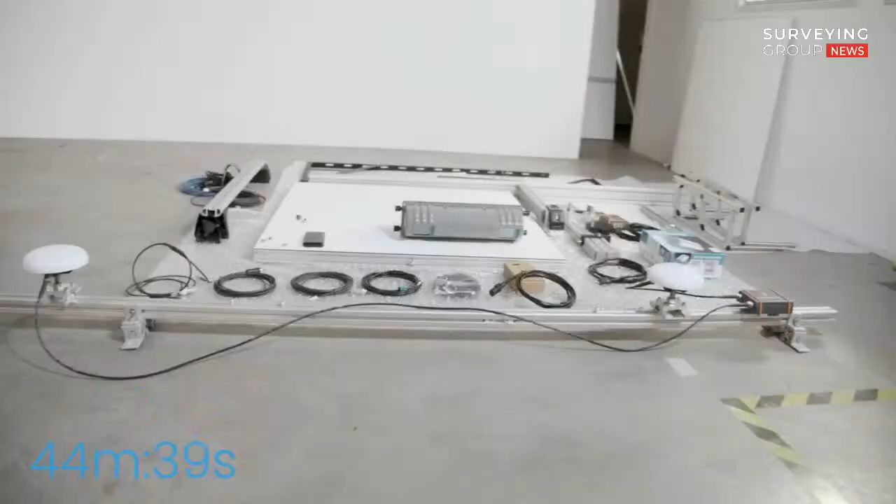XenomatiX is a leader in true solid-state LiDAR technology. The Xenotrac 6D road scanning system helps engineers, surveyors, and inspectors by delivering a complete 6D digital twin of the road. Xenotrac replaces time-consuming visual inspections and reduces cost by allowing road authorities to quickly and more accurately analyze the surface for roughness, cracks, potholes, and other damages.

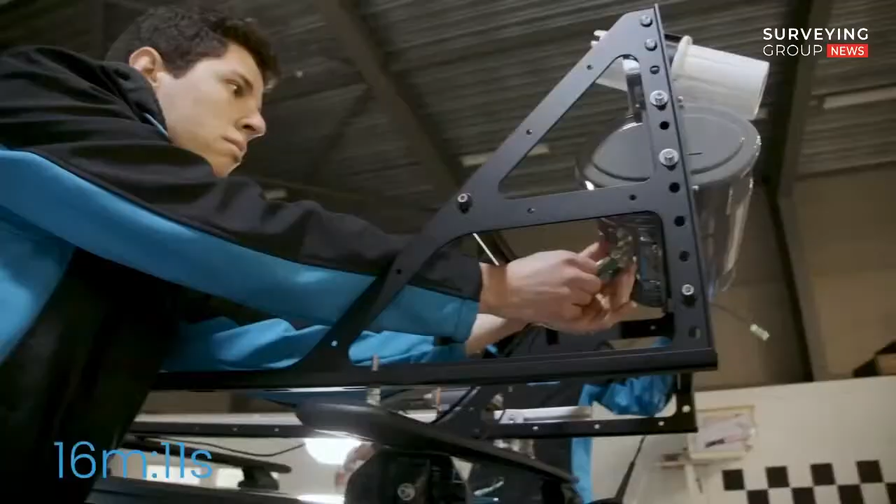With its fast and simple installation, Xenotrac can be mounted on any fleet vehicle, anywhere, anytime. In under an hour, and with the push of a button, city officials can begin gathering the data needed to determine which areas should be prioritized for repair.

Here's how it works. Available in single and dual-lane applications, Xenotrac establishes the three-dimensional geometry of the road surface, calculating the International Roughness Index and Rutting Quality Index. Xenotrac can accommodate all road surfaces, including concrete, asphalt, and cobblestone.

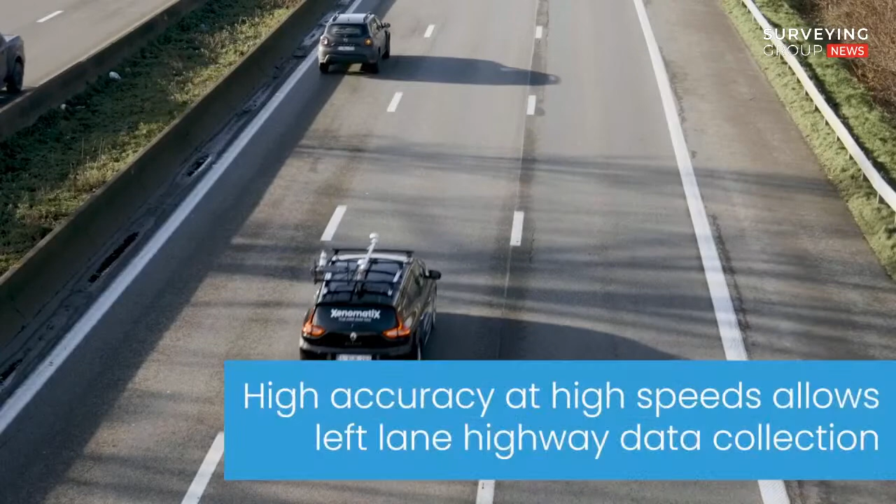Only one driver is required to collect and view the data, which can be obtained at both higher and lower speeds. Xenotrac leverages a millimeter-accurate 3D digital twin and high-resolution 2D camera images. In a single pass, the entire road is digitized, and any index or quality parameter can be calculated according to local or international standards.

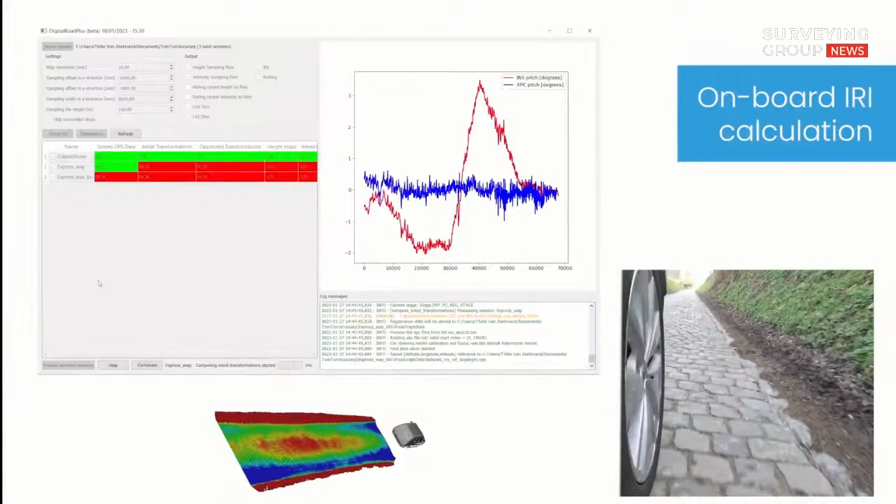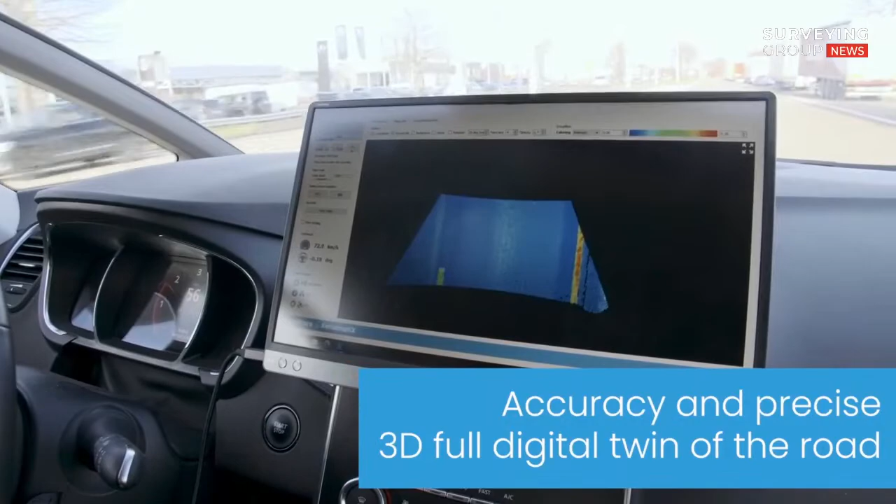Xenotrac also detects and logs important road and lane markings, like arrows or painted messages on the ground, with accurate georeferencing, thanks to real-time kinematic positioning.

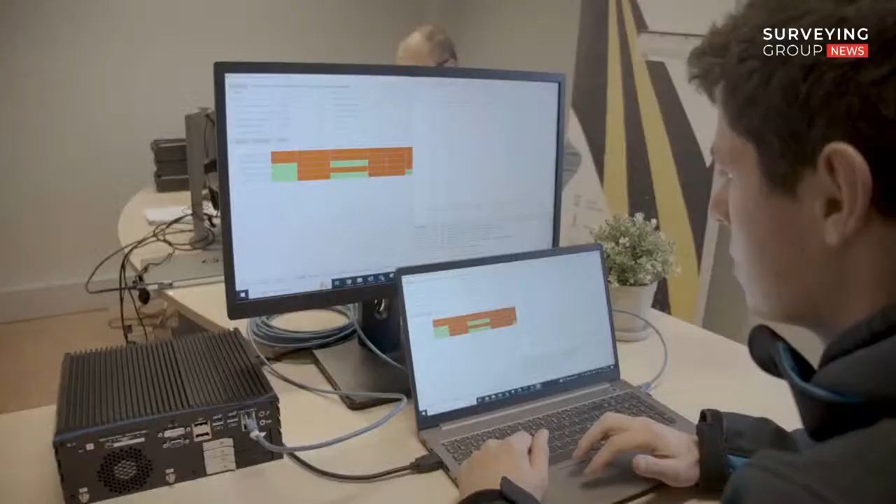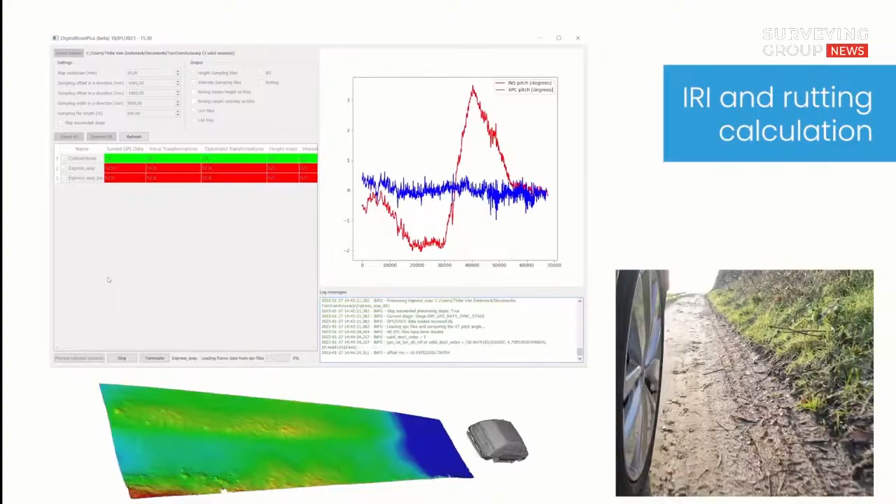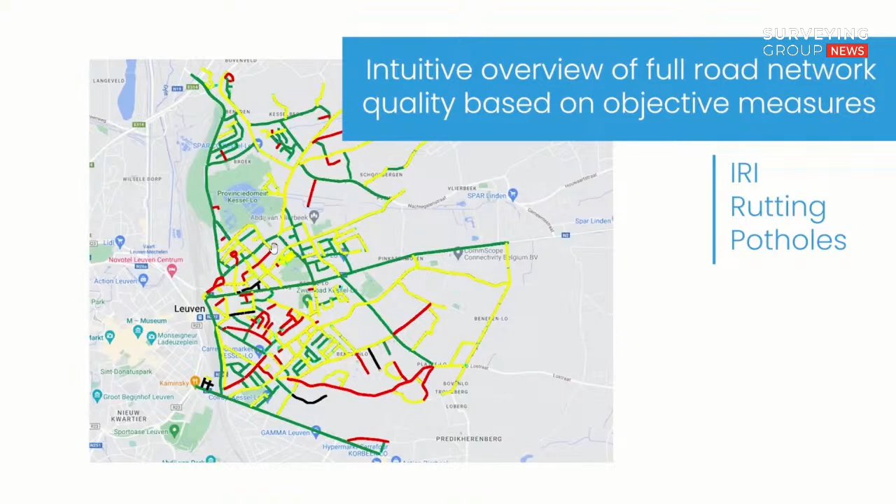geographical information system. Our engineering team meets with customers to examine the data and provide additional support. With Xenotrac, customers can prioritize and budget for critical road repairs, saving time and long-term costs.

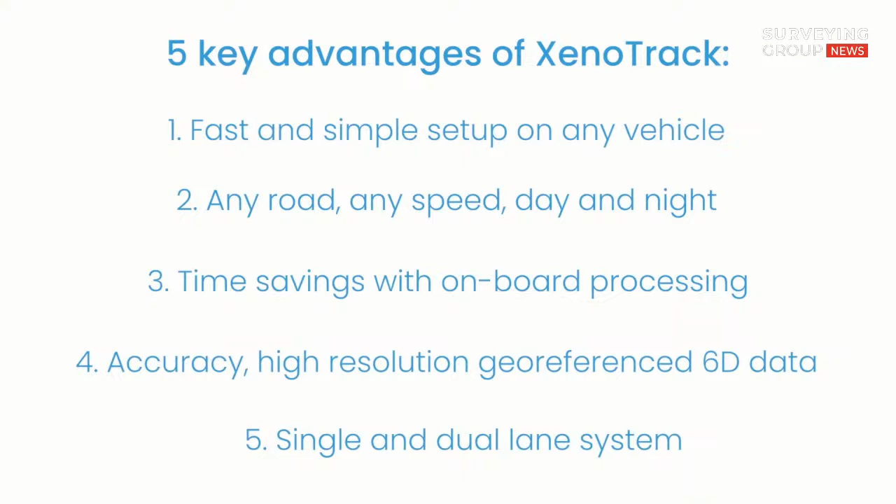At XenomatiX, our mission is to provide road safety and comfort with reliable, versatile, and affordable true solid-state LiDAR.

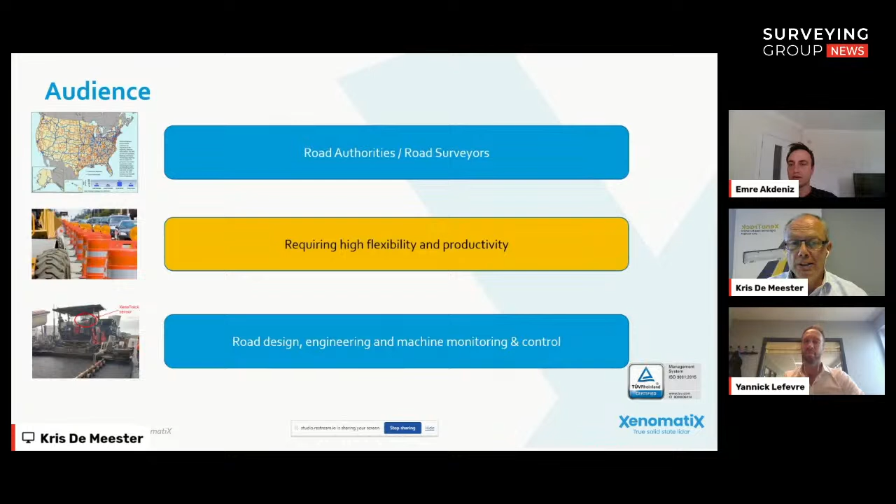The audience that we target are the road authorities and road surveyors, particularly the ones searching for high flexibility and high productivity. As an extension, we also target contractors, road construction companies, and even road construction equipment manufacturers.

At the end of this webinar, you will have gained ideas on how to improve your productivity in pavement management by looking at different kinds of data you need in your management platform, at the kind of road data that facilitates pavement management, at the frequency of data collection required, and at the new technology allowing productive data collection to start with.

For the contractors amongst you, you will see new opportunities to progress in virtual design and engineering of the roads. You will see the potential savings on material and preparation costs and get some ideas on how to assure first-time right construction or reconstruction.

Let me start with an example. Here you see the pavement management system from a larger city in Belgium. They started some months ago with this new pavement management, and here you see a section of their road network. Data has been collected over all these roads, resulting in automatically and objectively calculated road condition measures.

High road quality is represented in a green color, so good color, medium quality in yellow, and the worst roads have received a red or even black color score. At this stage and in this example, the road condition index is the IRI, the International Roughness Index. It's a standardized and worldwide used road quality index. Let's zoom in on this street with the red and black scores, and let's zoom in further.

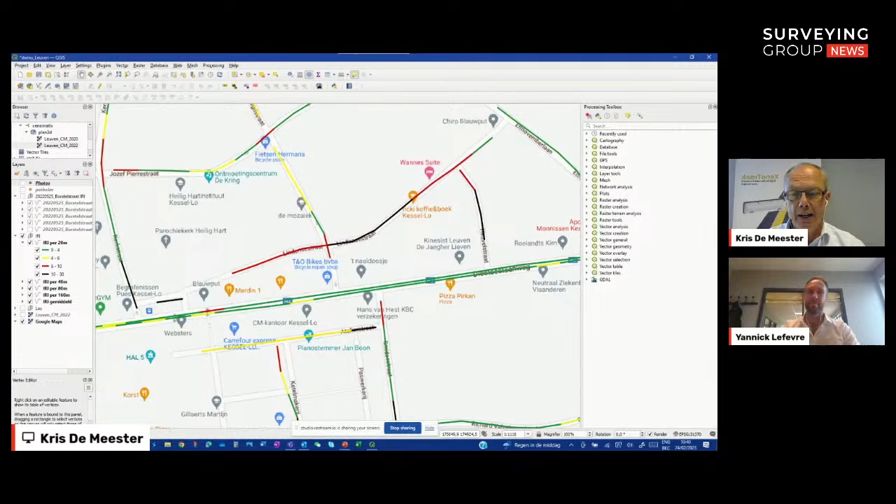Here you see the red score and the black score, the worst scores for the road condition, according, in this case, to the IRI. If you have orthophotos available in your geographic information system, you can check on the housing around the street with the bad scores.

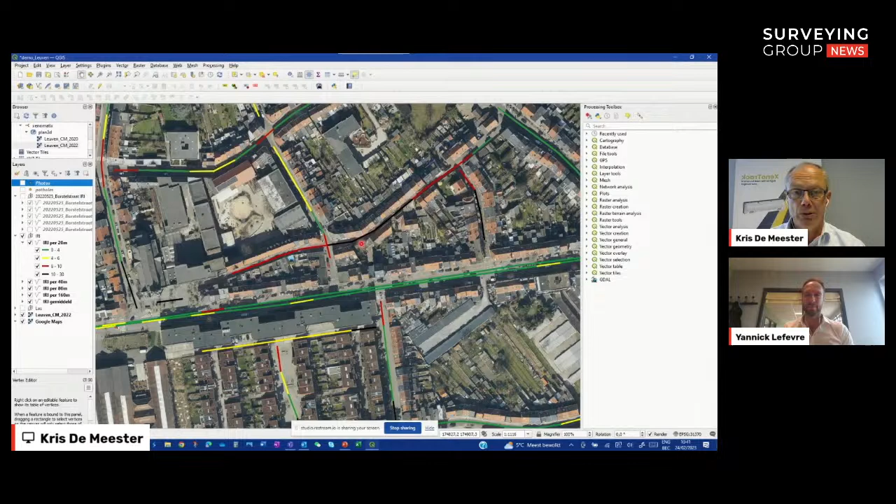And when you zoom in further and you visualize the layer of the digital twin, the LAS file, you immediately see why this street got the red and black condition score. The digital twin is the three-dimensional geometry of the road. Since it is hard to present 3 dimensions on a flat computer screen, we give different colors for different heights. Green meaning flat road, so good. Blue and purple meaning subsidence, deficiency, lower level. And yellow and red for geometry sticking out, like bumps.

Let's turn off the layer of IRI and focus on that digital twin. You notice that this street has many spots of subsidence and potholes. And also part of the road sticking out, yellow and red. Intuitively, you already have an impression why the scores of these two streets are bad.

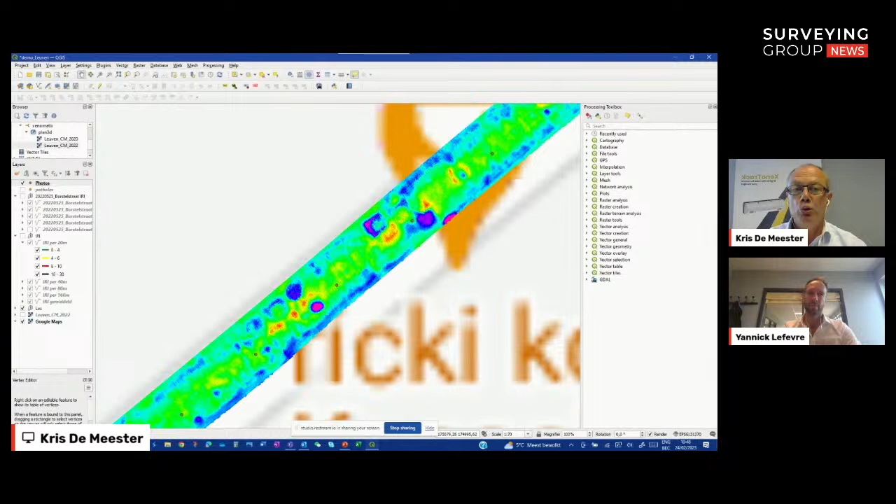Zooming in further, we see manholes sunk in, a larger pothole, subsidence on the sides of the street, and the green-brown dots on the roads represent the positions of 2D photos taken. And we take photos every 5 meters as a standard.

Opening one of those photos, we recognize the manholes, indeed, but it's much more difficult on 2D photos to recognize any geometry. It's hard to see on the photo that the manholes are indeed sunk in, or that the sides of the streets show irregular subsidence.

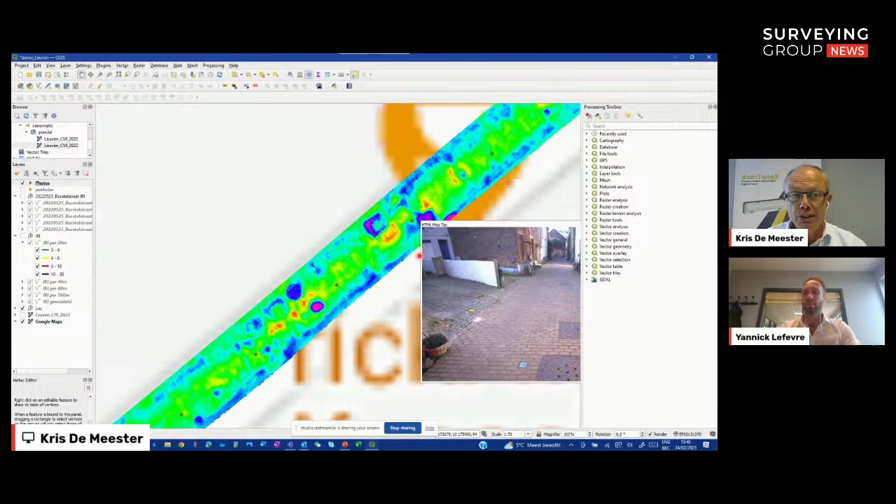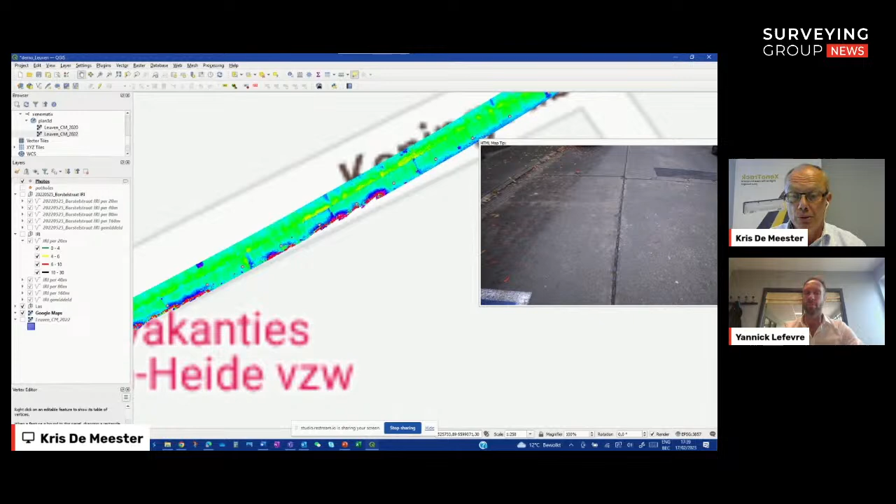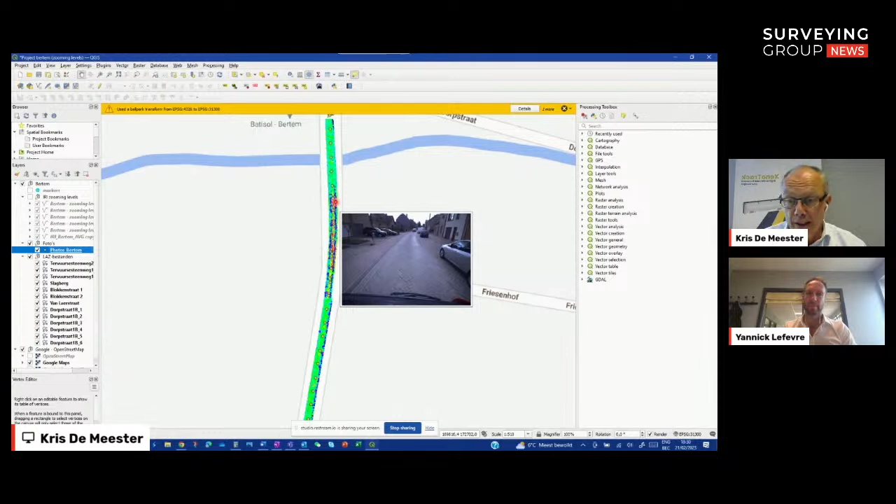Or a street in element paving, where wear is seen clearly on the photo, but rutting only detected on the 3D digital twin. Zooming in shows the rutting. No need for a photo. And for people with experience, you can imagine the cause and even the repair and required cost. It's like you're measuring in detail on site, on the spot.

Going back to the overview of the road network, the road condition is visualized intuitively with colors. To manage your budget, you check on the cost estimated to recondition each of the red and black roads. And if your budget is too small, probably you decide to start the red score for an IRI of 8 instead of 6, like here. And this way, you still keep your focus on the objectively worst roads.

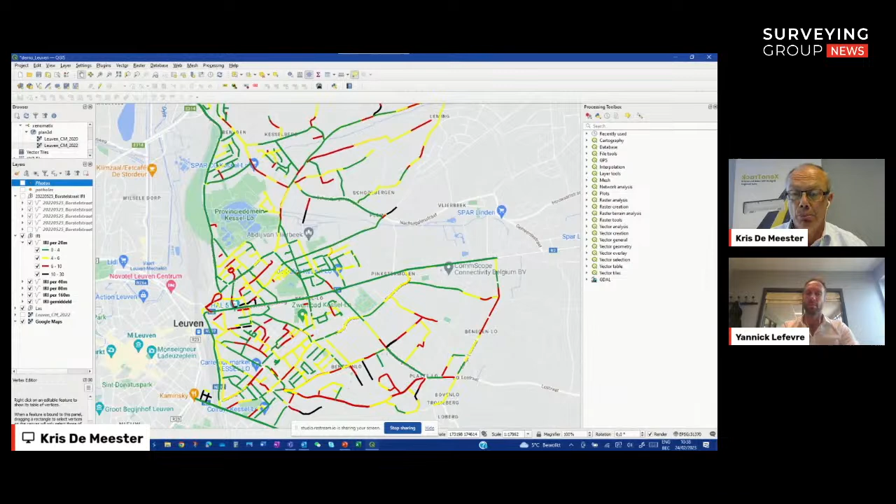The objective measure and numbers remain, but it's up to you, the asset manager, to set your threshold, so align required works and available budgets. In the next section, we enlarge the measure of IRI to one that accounts for other important information to do productive pavement management.

In the example, we presented the IRI as a measure to manage your road assets. In reality, the road pavement manager has to account for quite some more factors. The IRI is a valuable road roughness index, a road comfort or road quality index. But in case you decide you like roads that are by nature more rough, you don't want them automatically popping up in red and black scores. Cobblestone roads, as an example.

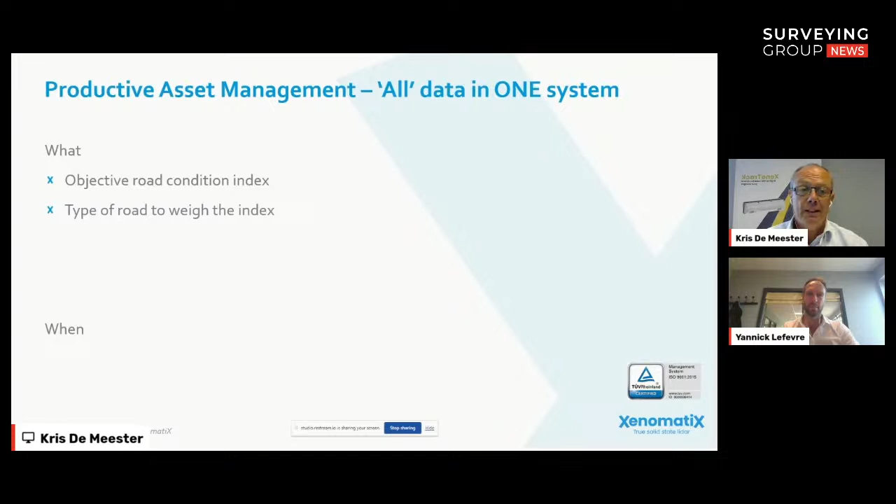They have by nature a high roughness. But some communities like cobblestones as heritage or even as a natural incentive for the drivers to drive slowly. So it's an idea to weigh the road roughness index with a factor depending on the road surface, and this way align the quality of a cobblestone road to an asphalt road.

Traffic intensity is another factor influencing your budget allocation for road reconditioning. Roads that many people use multiple times a day deserve more attention or earlier budget than roads that are rarely used.

Another factor of importance in road pavement management is the existence of assets underneath the road surface, like water and sewage piping, like electricity or communication lines, and so on. How often have you seen a road repaired and a month later, workers breaking open the street to work on utilities underneath the road?

Besides the planning in your asset management system, there's even a relationship between the condition of the road and utilities underneath the road. I remember one time we reported our road survey data to a community and pointed out a suspicious larger area of subsidence near to some manholes. The mayor requested the inspection of the sewage, and part of the piping turned out to be broken.

So important underground damage, like important leakage, causes subsidence in asphalt pavement. And therefore, we promote a regular road survey, not only to check road condition, but also to check the assets lying underneath the road. Another case, I don't know whether you remember, but we here in Belgium, we do. It's like 8 to 9 years ago, we had a kind of a big accident in a suburb of Brussels, the capital of Europe. A public transportation bus fell down in a major hole in the middle of the road.

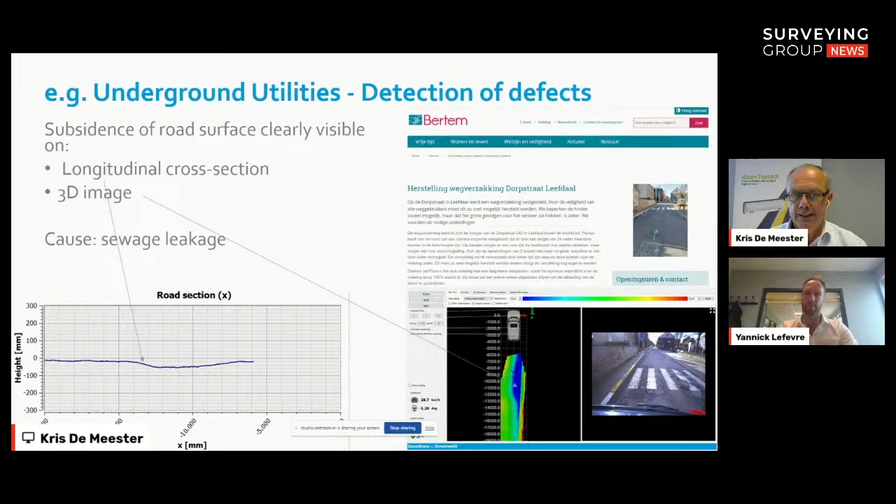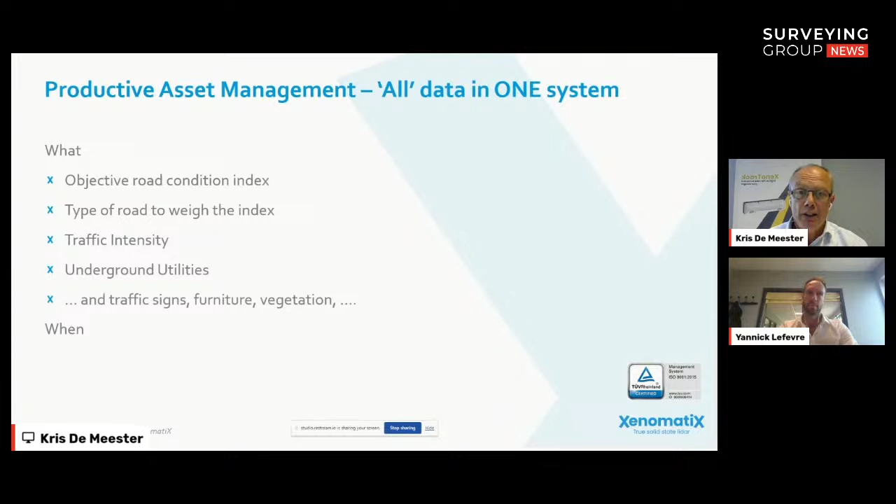And other assets like vegetation also play a role in road condition degradation. So here the key message is that productivity is enhanced if you gather related assets in one and the same platform. Now, how often do you need to survey the roads for a productive road asset management? Every year? Every 2 years? Or 3 years?

We work closely together with the Belgian Road Research Center, and scientific research has proven that it is economically beneficial to measure and repair regularly compared to letting the road degrade and having to do more expensive repairs later on. Scientifically proven. So there is an optimum to minimize the sum of survey and repair cost, and that favors regular condition survey.

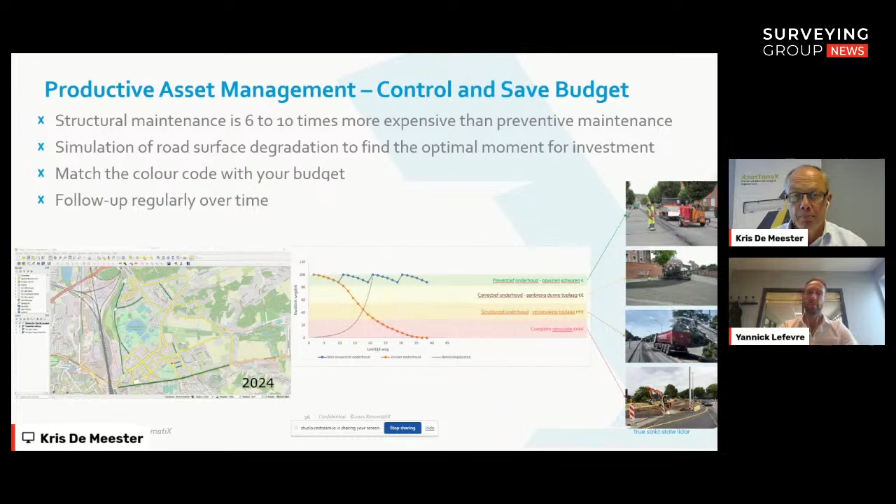We even have a customer that measures his road network of thousands of miles twice a year, one time before winter and one time after the winter. And after the latter survey, that customer immediately defines the required works to execute over the summer period with the sole purpose that the impact of the next winter remains limited and that he minimizes his repair budget over time. But you don't only measure for follow-up of your road condition. You also measure to check, of course, the quality of the contractor's work just finished.

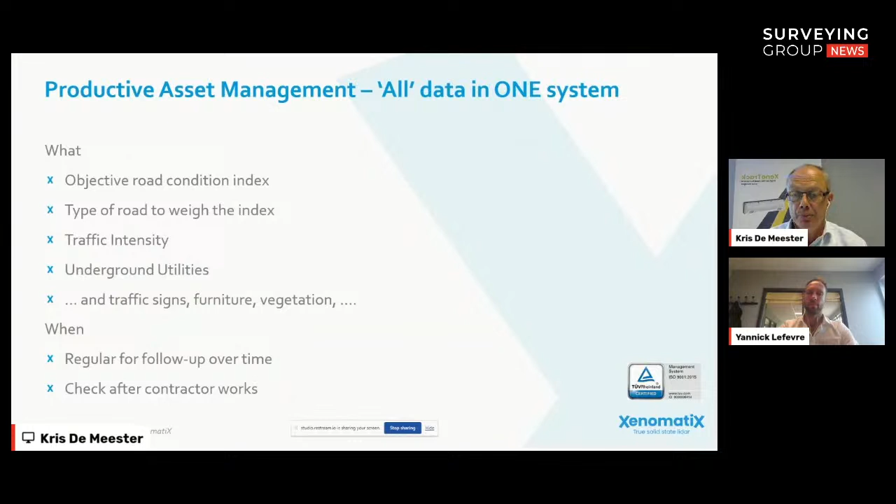Let me tell you a nice story, or maybe not so nice story. An intercity road showed worn concrete slabs, resulting in lots of traffic noise and discomfort for the commuters and the neighbors. A year before election, like often happens, the council decided to renew the worn concrete slabs. The works were executed, delivered, inspected and accepted. Less than a month later, complaints from people were accumulating. Horrified they were that the condition of the road was worse than before.

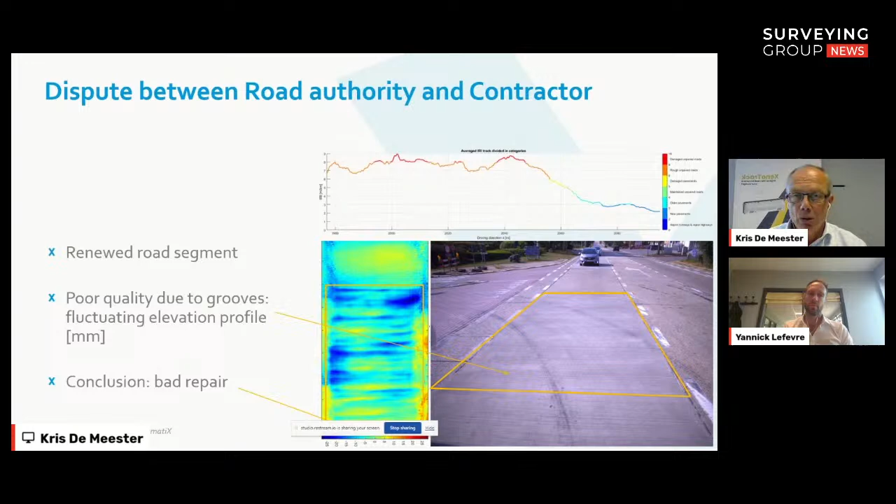The flattening of the concrete was done manually with a ruler, and that's allowed by contracts most of the time, but the concrete was too dry and hence was sticking to the ruler that was pulling away concrete material, creating grooves. So not only does the 3D show you the damage, it often indicates the cause, and you don't have to be a road engineer to see that.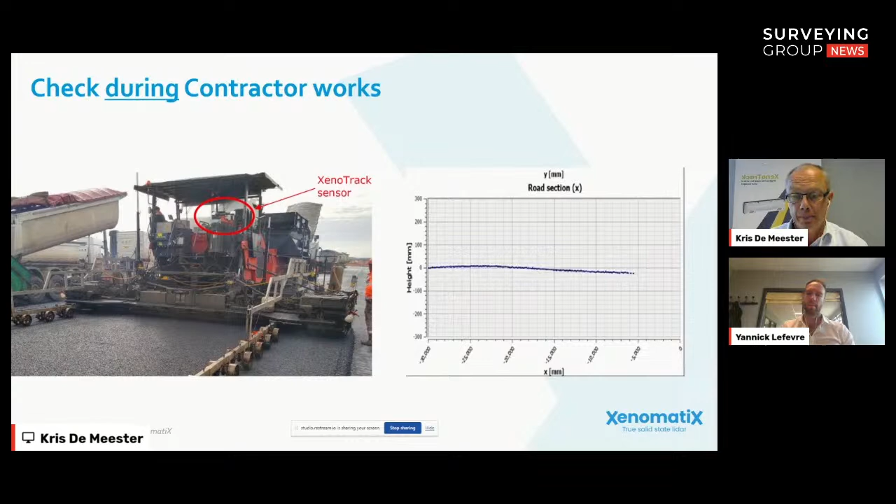And it's actually such a case that motivates contractors to use the same concept for measuring the new paved road during the paving process itself. Some road pavement equipment manufacturers are even developing solutions to monitor and control the work ongoing. And although some will disagree, the most gain of your productivity is that you can check, analyze, combine data from behind your desk. If you have a fast and accurate road survey and you get comprehensive and processed data on your desk, you can spend your time with the interpretation of the data and with managing your assets and taking sound decisions.

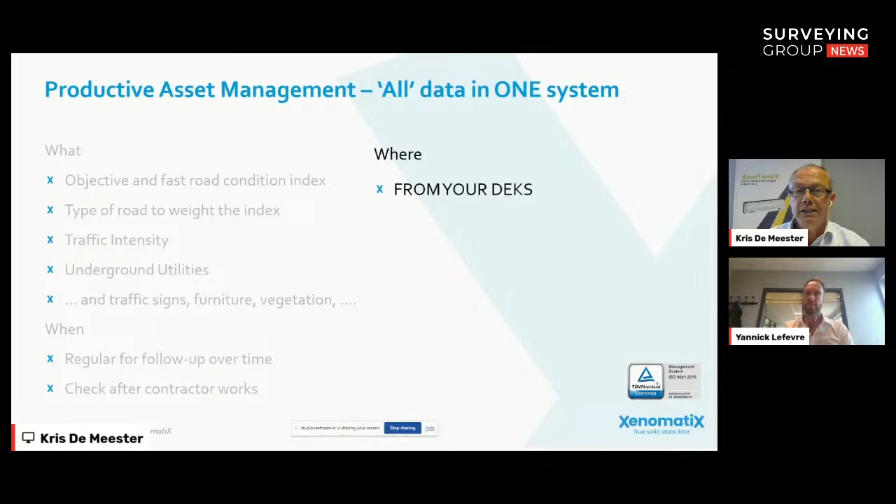What do we mean with comprehensive data? Well, we promote from our side the 6D digital twin. The 6D stands for 6 dimensions. 3 dimensions for the geometry of the road surface, 1 extra dimension to include road markings, and then additionally high-definition photos every 5 meters, as I mentioned before. The data is captured independent of the road type, with an accuracy that allows correct calculation of standardized indices like IRI or evenness coefficient for any kind of surface.

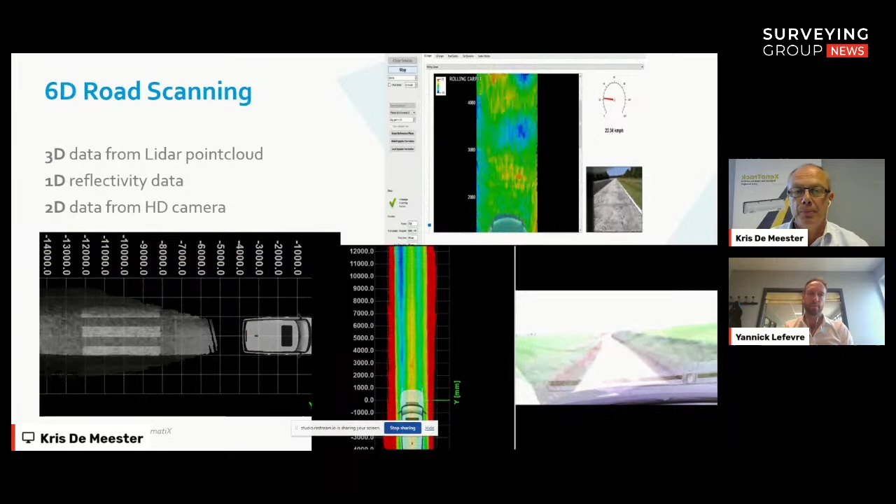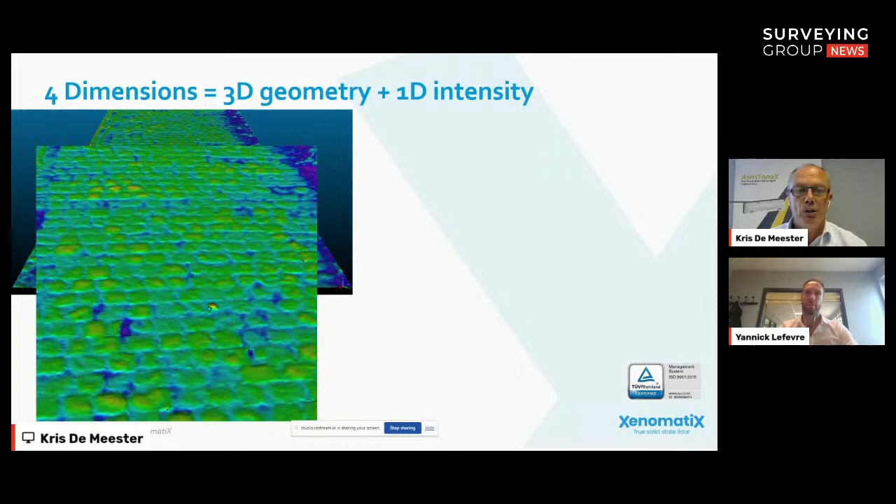Here an example of a cobblestone road, and when we zoom in, you see the detail of each of the cobblestones, with the joints in between the cobblestones somewhere more widespread than at other positions. And again, also the intensity information on this road; there are no markings.

And this brings us back to the beginning of the presentation, the pavement management platform with the color representation of the measured geometry of the road markings, and the related georeferenced photos. All this is already in place for quite a while. Let me tell you why we need a new dual lane road lidar, the dual lane XenoTrack.

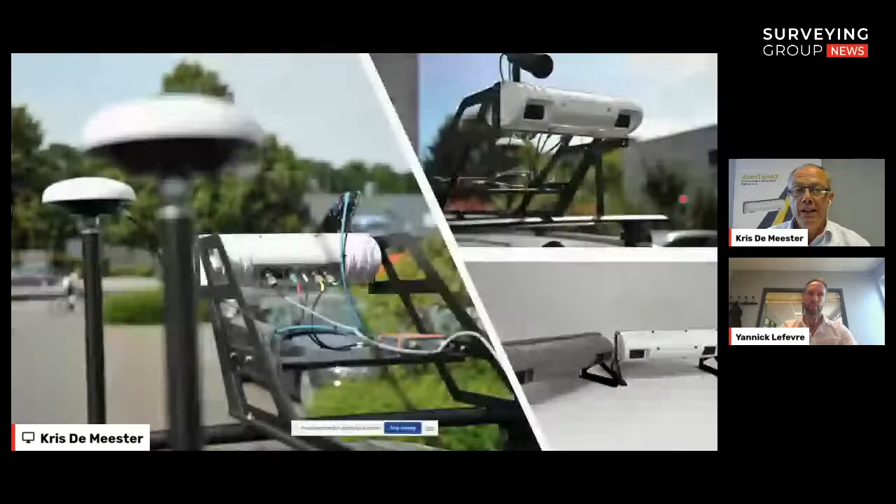For those who are not familiar with the single lane XenoTrack, a short refresh. The lidar with the white housing is a single lane XenoTrack. The one with the gray housing is a dual lane XenoTrack. The lidar sends out 28,000 lasers to the road surface, and the reflected invisible infrared light is captured by the other side of the lidar. Above the receiver of the lidar, you see the high-definition camera mounted for the photos every 5 meters. And all equipment is linked to an RTK GNSS IMU with dual antennas for synchronization and aligned georeferencing.

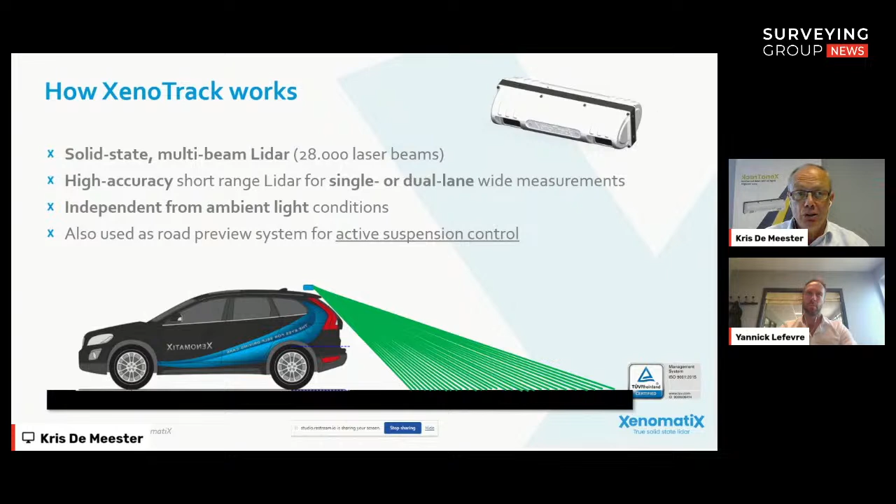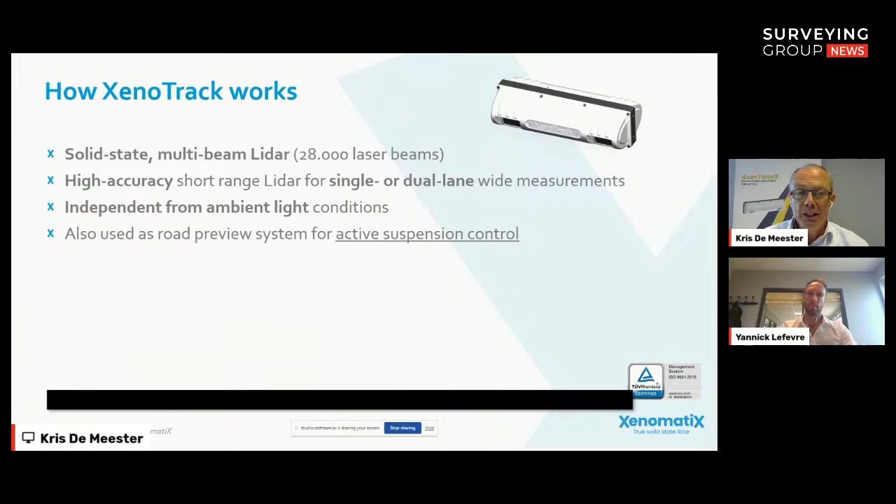As long as the vehicle does not move, the 28,000 lasers measure the same points on the surface. It's when the vehicle starts driving that the lasers scan the road surface and that the same point on the road is measured multiple times, resulting in millimeter accuracy of the road geometry. And the single lane road lidar is already very productive. And one of the unique features in that concept is actually the onboard post-processing.

The controller collects the raw data from the sensor and forwards the individual point cloud frames to the processing unit. The processing unit combines all the data to one digital twin of the road while driving, and even starts taking sections and calculating measures like IRI, evenness, or rutting. So this means by the time you come back home from a full week of surveying, as an example, your post-processing is already well advanced and probably even finished. But okay, those are already features for the single lane. So the question remains, why do we need the dual lane?

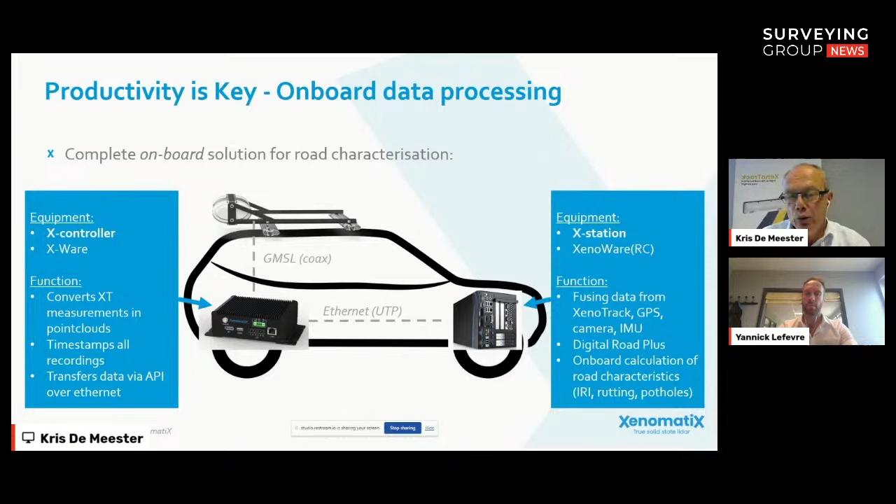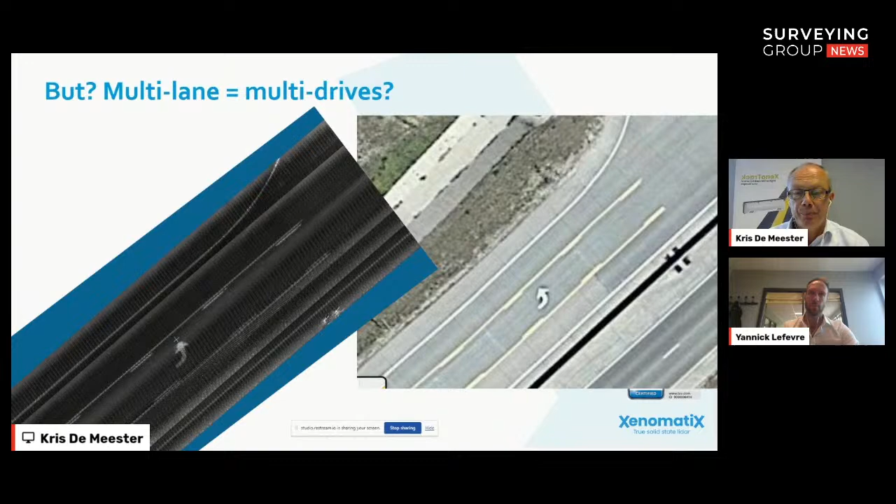Well, for multi-lane roads. For multi-lane roads, you have to drive the road multiple times. And after the data collection, you still have to stitch the data of lane 1 to lane 2 and so forth. And while some customers have the algorithms and the knowledge to do this stitching, it still remains a tedious and time-consuming job. The same accounts for surveys of runways on airports. The last project we did, we had to drive 15 times back and forth to have the full width of the runway captured. It only took us 2 hours, but anyway, with a dual lane, we literally save half of the time.

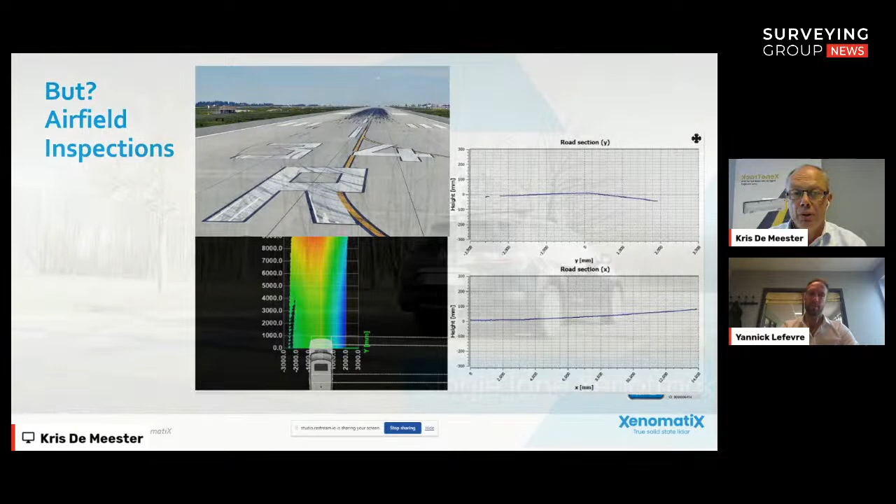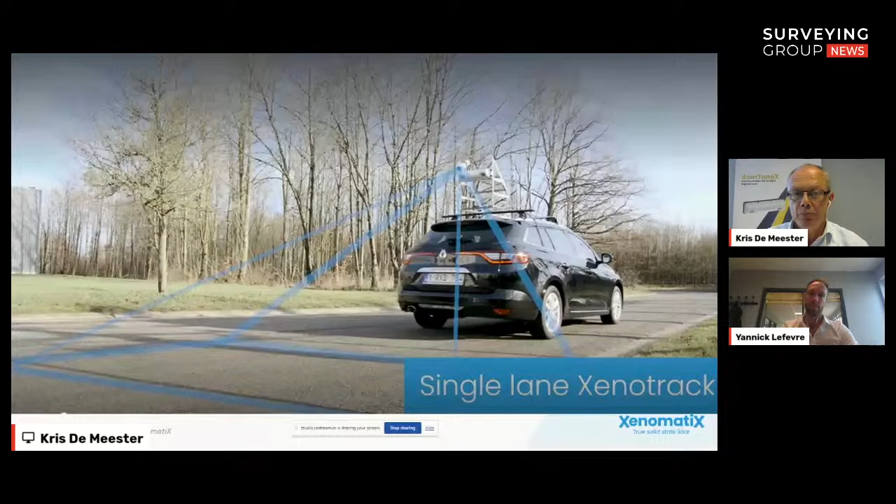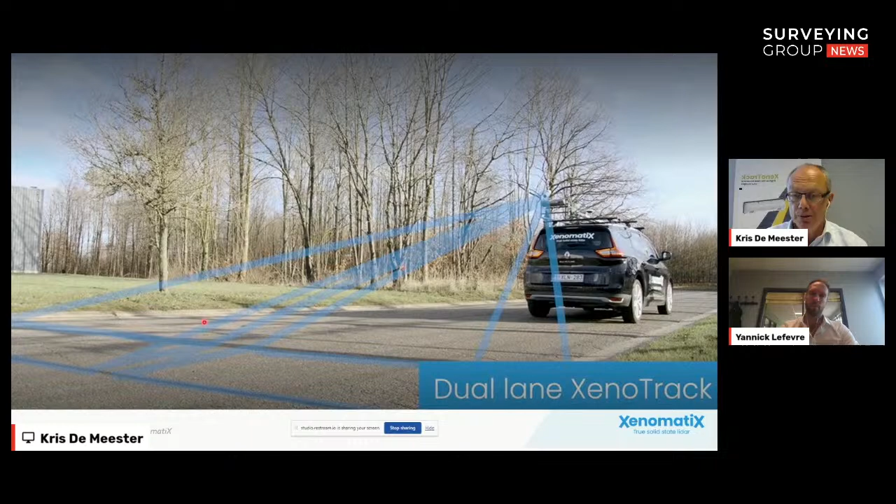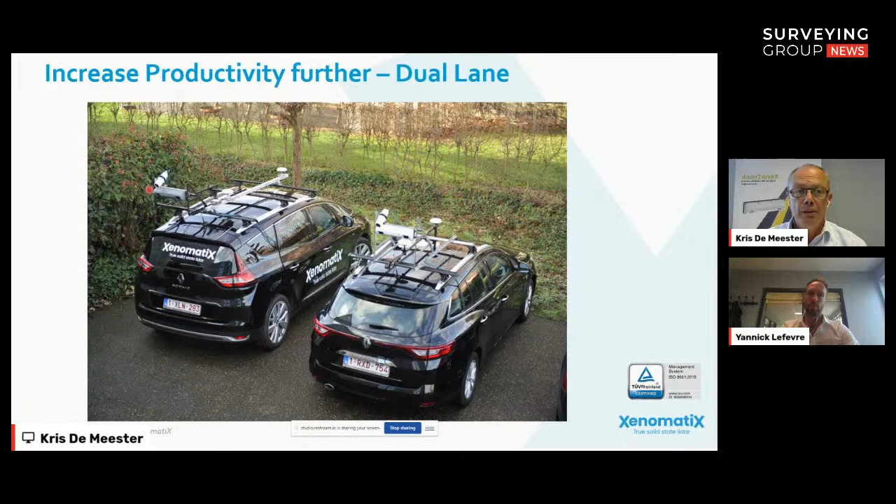With the single lane XenoTrack in the market, the request for the dual lane came actually from customers, eager to increase their productivity even further. Also, the idea of the dual lane mounted on one side of the road, measuring the lane you drive and the neighboring lane, was launched. On this picture, you see the single lane and the dual lane aside, the single lane with the white housing on the right and the dual lane gray housing on the left. Notice the difference in mounting. The single lane mounted in the middle of the roof and the dual lane mounted on the side of the roof.

Especially for road authorities and road surveyors that specialize in highways and multi-lane roads, the productivity is increased drastically. And it gives opportunities also to get more detailed insights of the full highway. Today, often only the slow lane of a highway is measured for reasons of time and required speeds on the left lane. With the dual lane system, you can drive on the middle lane and collect the data for the middle and the left lane. Or when you drive on the slow lane on the right, like you do today probably, you also capture the road conditions of the middle lane.

So more data to decide whether the full highway needs reconditioning or only the right lane, or the right lane and the middle lane, but not the left lane. So this way, besides saving on time for the data collection, you can also save on the contractor work. But probably the contractors in the call would not like this suggestion.

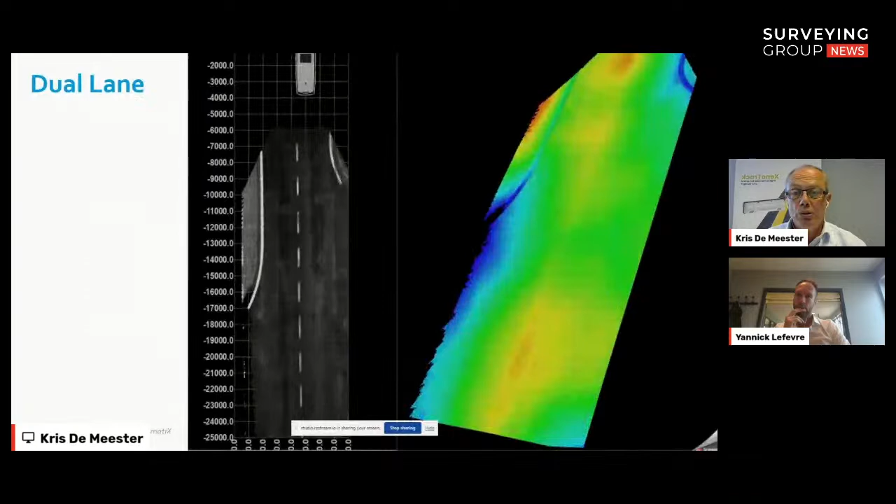By the way, that specific customer that measures the thousands of miles of his road network twice a year is a customer of the dual lane system, as you can imagine. The output of the dual lane is completely similar to the output of the single lane, with the 3D geometry of the road markings, and then the aligned georeferenced pictures.

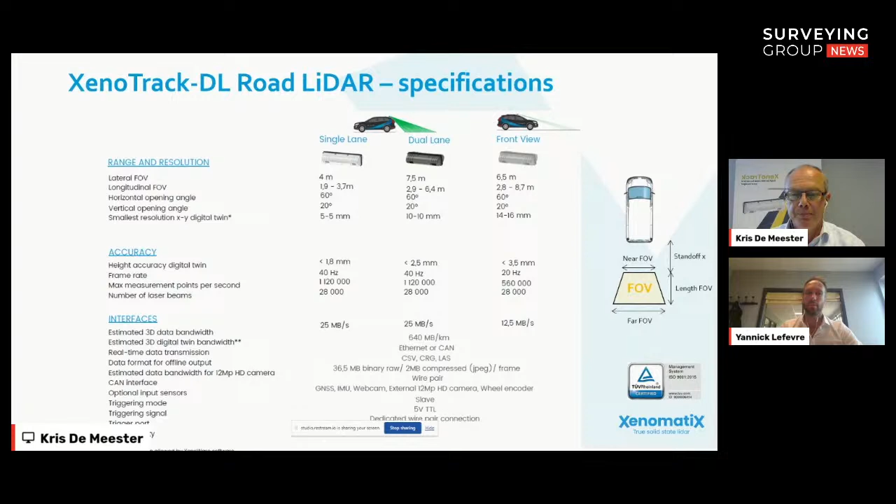The main point of this webinar is to talk about productivity. Let me summarize in 5 points the gain of productivity with the XenoTrack system. Point 1, the system can be set up quickly and easily on any vehicle and can be swapped from one vehicle to another. You might have seen that in the introduction video just before this webinar.

Point 2, the road LiDAR XenoTrack digitizes any road at speeds up to 90 km per hour. Above that, you might have some blur, so up to 90 km perfect data, and you can do so day and night. Point 3, post-processing is started on board while collecting the data. The data are highly accurate and with a high resolution, more than most will ever need. And then finally, the new dual lane system can further increase your data collection productivity with a factor of 2.

We're already at the end of the webinar, so time to wrap up. For the road authorities and road surveyors, you have seen the importance of assembling all related data in one management system. You've seen accurate and objective data, intuitively visualized and practical to use in your decision making. I hope I convinced most of you of the importance of regular road surveys to actually save on your budget over time.